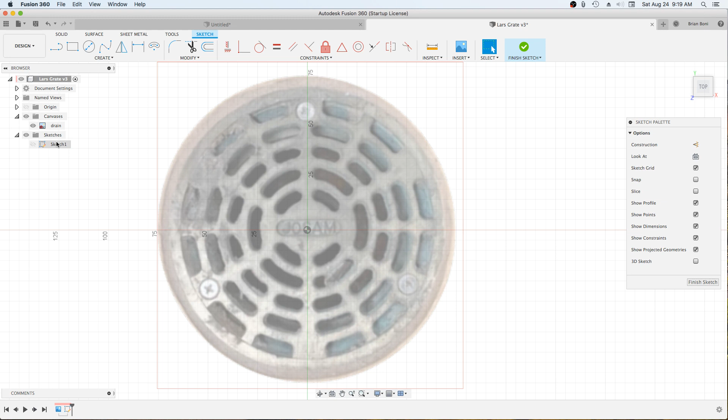Then bringing it back into Fusion, I've set up a sketch where I've dimensioned it. And what that shows me in the dimensions here, if you look down, this one round mounting screw hole - it's not symmetrical.

So this was designed as two parts: the bottom part, which is the actual drain, and then the grate part, which is what we're looking at. Since both those parts are made out of metal and they're screwed together, they would have been designed together so that they fit. The way this was designed, there's only one way that this cover would have gone on where all three screws would have fit.

So you can see I've drawn a bolt circle, and then I've divided it off. This one side here is not mirrored to the other side, and the bolt circle is a bit different. So this grate has a top and a bottom, I guess you'd call it when you put it on.

Okay, so what I've also done is made concentric circles so that I can measure the distance between the rings. And what I've noticed is that it's not high decimal accuracy here, for whatever that matters, but if we're reproducing it, we want to know that.

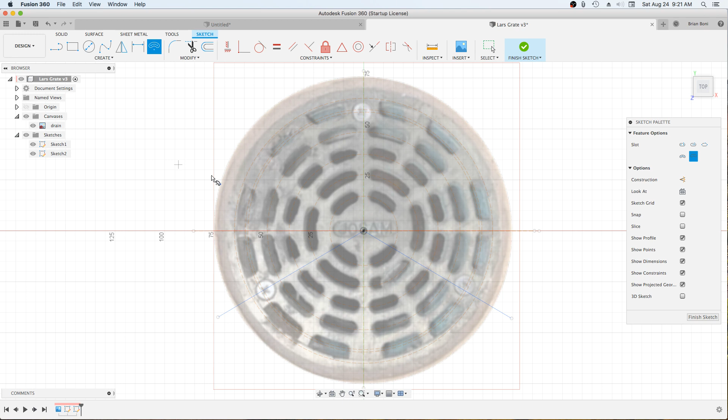So that's my first sketch, and I'm going to use the center point arc slot tool. The reason I do that is all of my circle patterns are concentric to each other, and it won't look wonky like this one does.

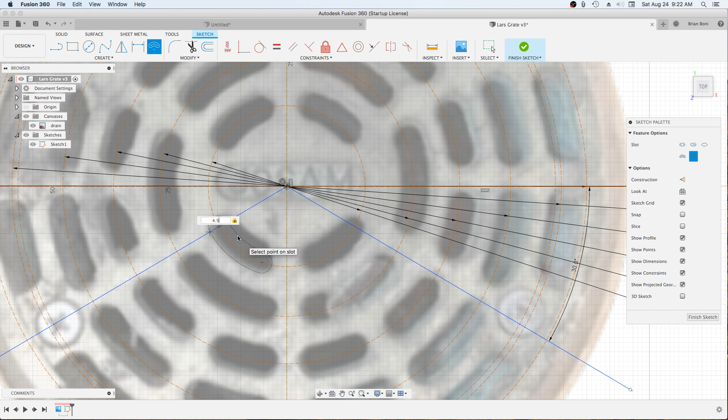Okay, so we pick up our center point, and now I'm going to find a good spot, and we're going to call the spacing on the holes 4.5 millimeters. Okay, so that's my first one.

And what we're going to do is mirror that one. So it wants to know where the mirror line is, and we're going to use that mirror line. Okay, so we've got our first pair of them. Now we're going to mirror them once more, except this time the mirror line is going to be here. Now we're going to do another set.

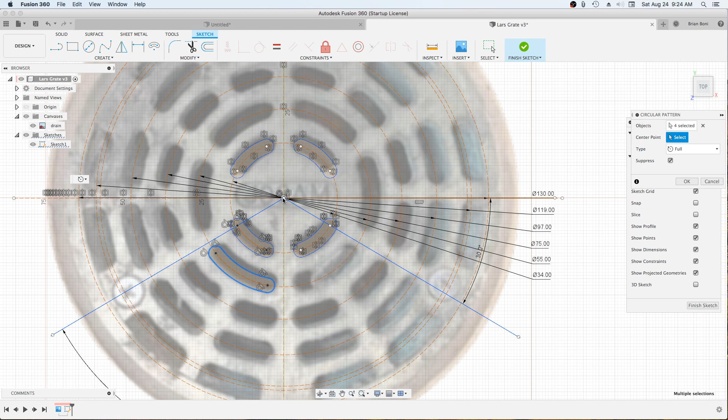We're going to do this ring here. We'll start off at the center, that ring there, spacing 4.5 - do we like it? Yes, we do. Select it, circular pattern: 1, 2, 3, 4, 5, 6 of them. Center point, the same - it'll always be the same center point. This will be 6 patterns. How does it look?

Looks pretty good. Let's do the next ring. Center point. Pick this one here. Point 5. How does it look? Looks okay.

We will circular pattern that again. Center point, which will always be the same one. And then is that 6? No, it's 1 through 12. Okay, 12. Looks good. Next level.

Center, pick that one. 4.5. Looks good. Circular pattern, center point - there's 12 of them, I think. Yes, there is. Looks good.

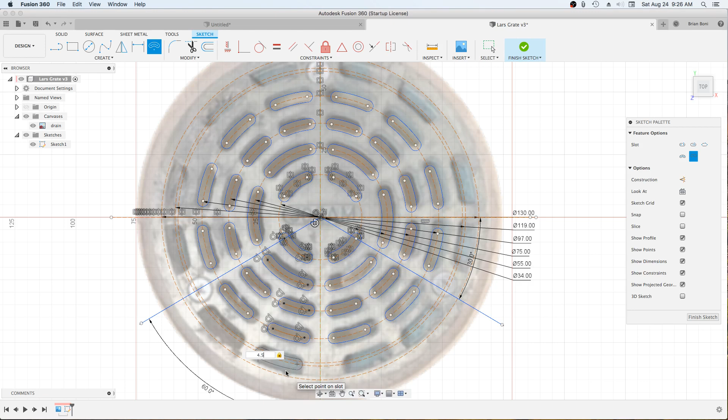Okay, so we quickly modeled all the center holes. Now we're going to do the outside holes. They're a bit different because they attach to the outside edge. So we're going to start off about there to about there, 4.5.

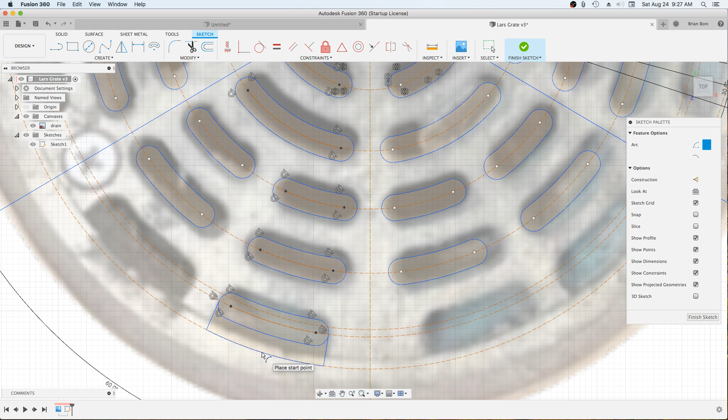And what's different about this one is we have to attach them out, so we need to add some lines here off to the tangent and then out to the outside line, from the tangent to the outside line. Now we need an arc, there to there. Okay, that's good.

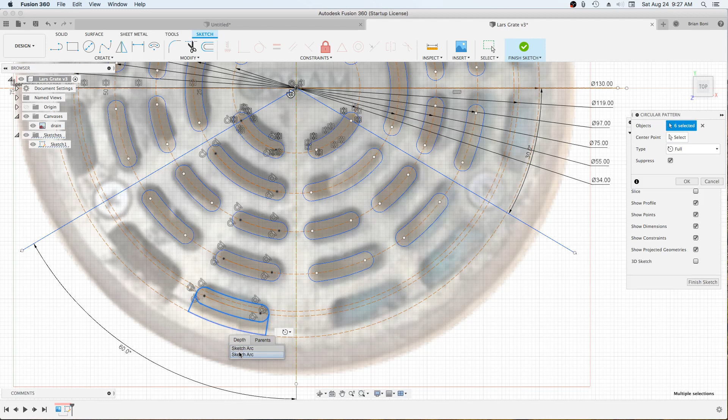So now we're going to reproduce it around the side with a circular pattern. That's for the circle, plus we're going to add this line and that line. Center point, always the same center point. So how many is that we're going to have to do here? 1, 2, 3, 4, 5, 6 - so we'll call it 12.

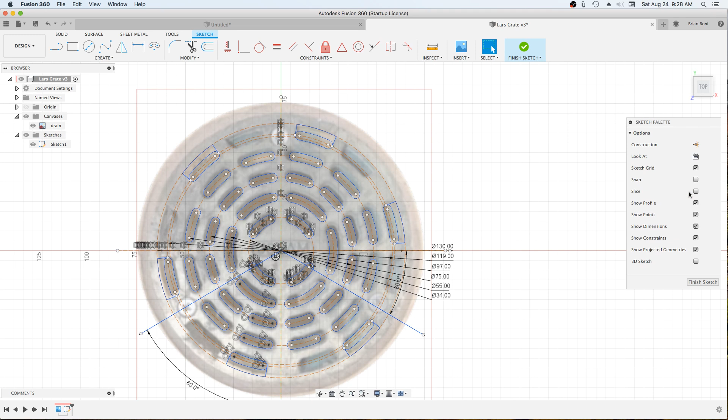And what we're going to do is turn off every other one. How does that look? Okay, it looks good. So now we're going to take one of them and duplicate it. Do we need to add those in? Okay, so now we're going to copy it.

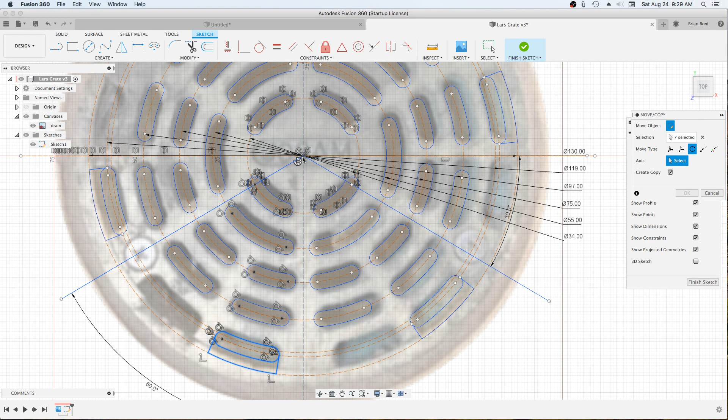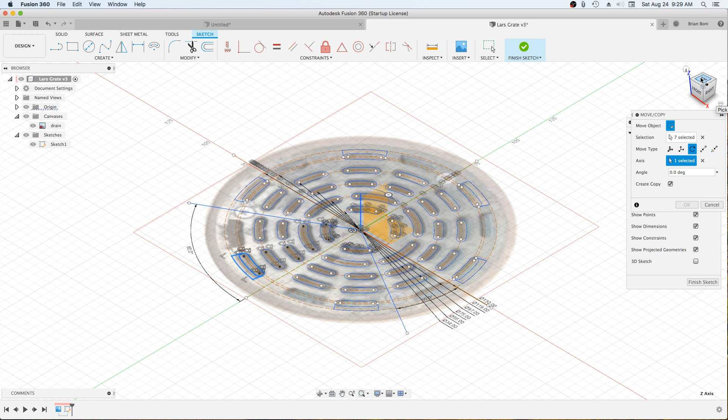Our axis is going to always be the center axis. Okay, this is a bit different, so what we're going to do here is - it's not the mirror command, so we'll turn on the origin, and then grab the center axis. Axis 1 selected, perfect. And then we're going to move it, let's see, 25 degrees - minus 25 degrees. Okay.

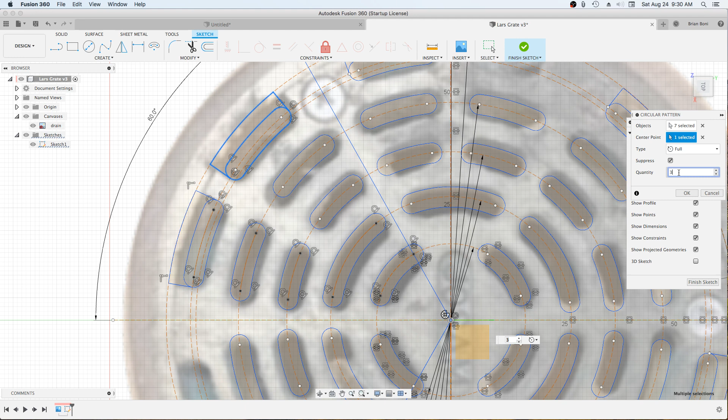Looks good. Four, five, six, seven. Okay, center point, quantity 3, and again we're going to suppress the ones that we don't want. Okay, so how does that look?

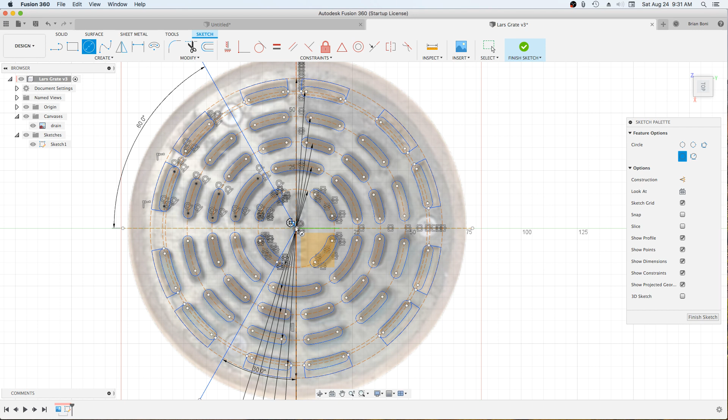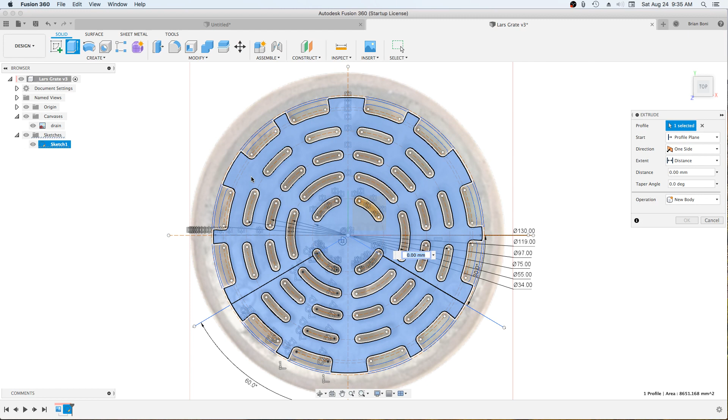That looks pretty good. Okay, now we're going to need one more circle to define the outside edge. So now we're going to make the hole to cut it out, and make sure that it cuts through all the edges - and it does. And extrude it to 5 millimeters, and have a look. Okay.

So all the rings are concentric, and all the slots have the same radius and same slot opening. There you go.